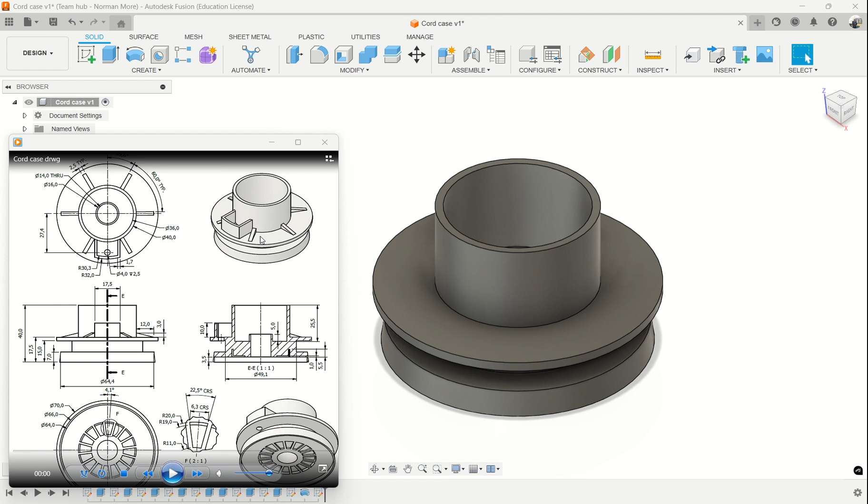In this video, we're going to continue the cord case, and we're going to put that pocket, those ribs, and some other cuts at the bottom. So we start with the pocket. We do a sketch there.

L for line. Track the center, do a line there. Line.

We do an offset, offset two sides. That is 17.5, which is the width.

So we put 17.5 and divide it by 2, because it has two sides.

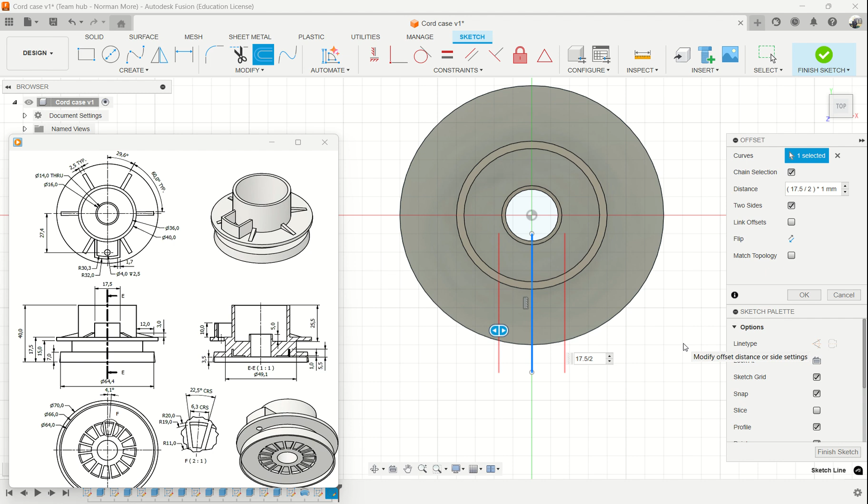And then we have the curve there, 32. So we go and use an arc. Let me push this one a bit down so that you see the arc. Center point arc, so we start there with the center point arc.

Then on that arc we put a dimension of 32. After we finish that, now let's push these dimensions a bit in the middle.

We trim off. T for trim. Then we can trim off all these. Trim these, maybe the lines were a bit too long. And then we can as well trim off that because we don't need it.

Then we can offset that. It's on one side and it needs to be inside, so we'll put a negative value there. The drawing thickness is 1.7.

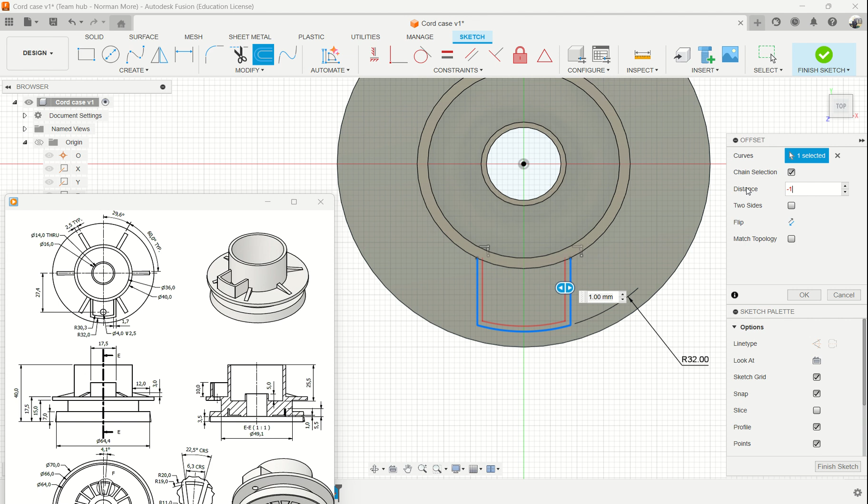But you can see on that drawing there, that's 1.7. So this one seems to be okay, but it's not fitting properly on that side, so we can extend that line.

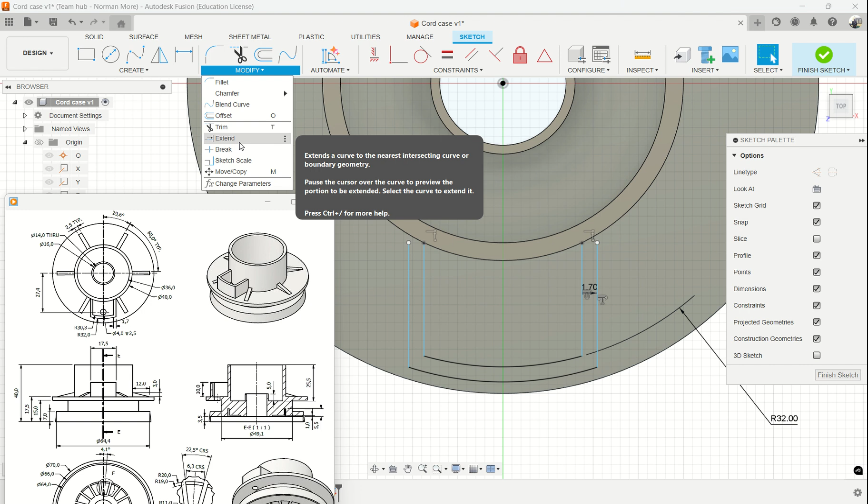We go to extend. Make sure that line reaches the end. So we do that extension.

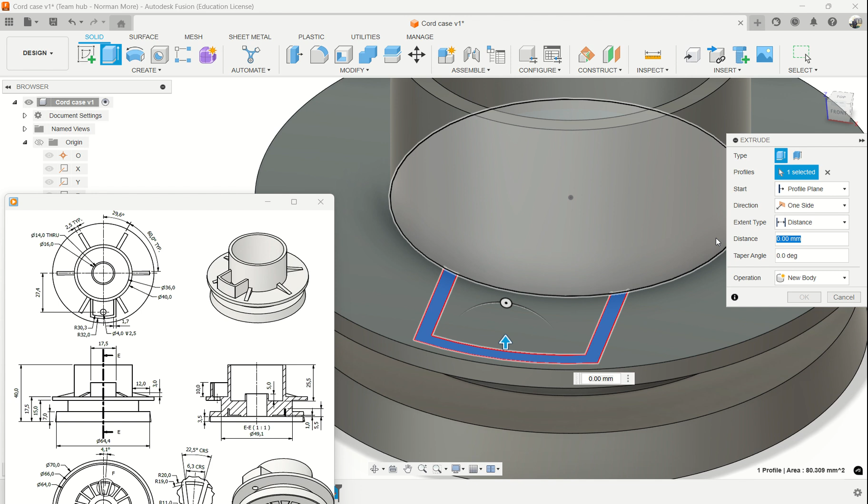What we need is that letter E. Extrusion has been selected already. The height is 10 millimeters. We put 10 and that is done now. It will blend in properly.

Look at the bottom face, there's a small hole there of 4 millimeters. So we track the center of the 4 millimeters, that is the size of the hole. Then we also put position dimensions, which according to the drawing is 27.4.

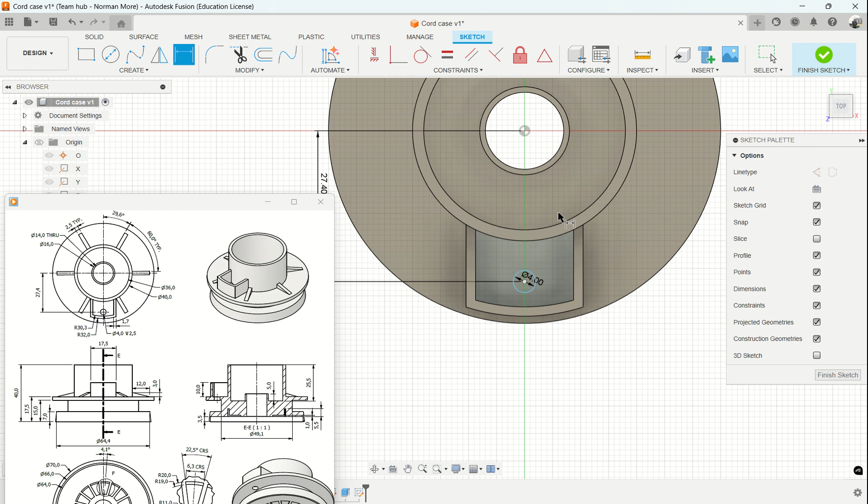And we need to extrude this one, letter E. Click on the circle. It says negative 2.5, so we put a negative 2.5 because it's a cut. That is the hole there.

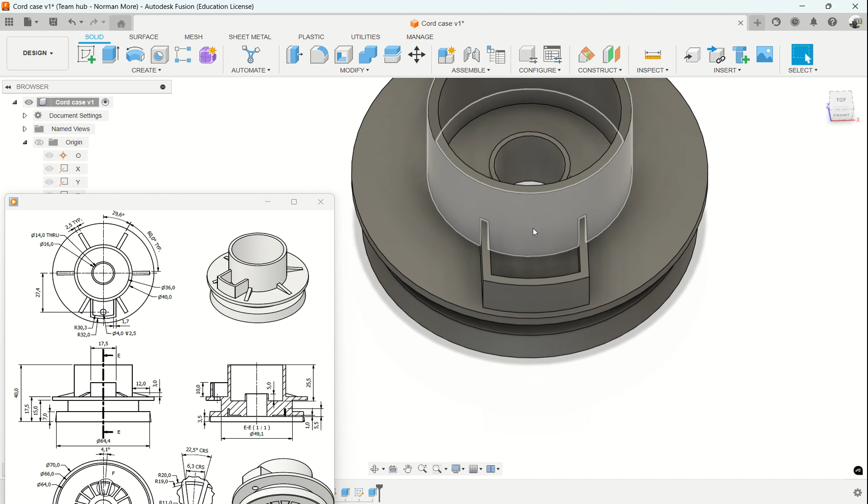So now we go to do the ribs. Click on that face, go to sketch. So we need a rib which is at 29.6 degrees, which is that one there.

That's our center line. We can put the construction, and then letter L again for line, and we do another line from there. Line hasn't gone properly, letter L for line.

Okay, then we put the angle there. I didn't want this line to go very far, I think I'll just pull it down somewhere there. The reason is that we don't need it outside.

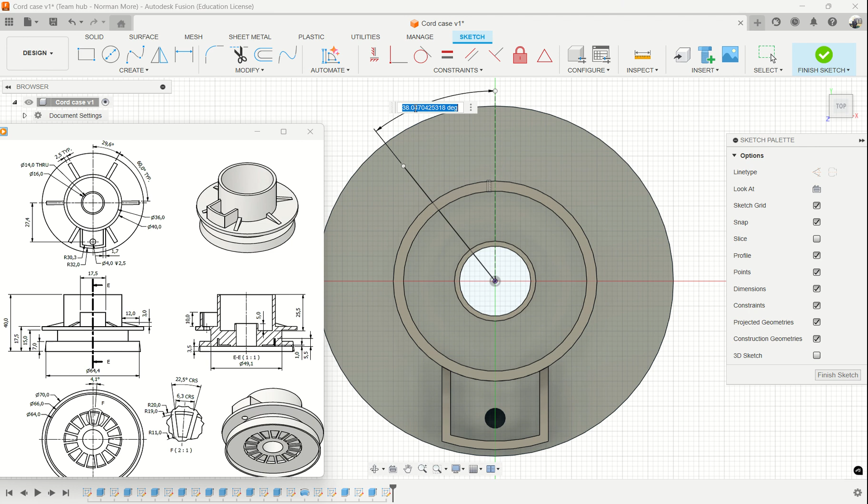So we do that angle, 29.6, and then we need to trim off now because we need that line for creating our rib.

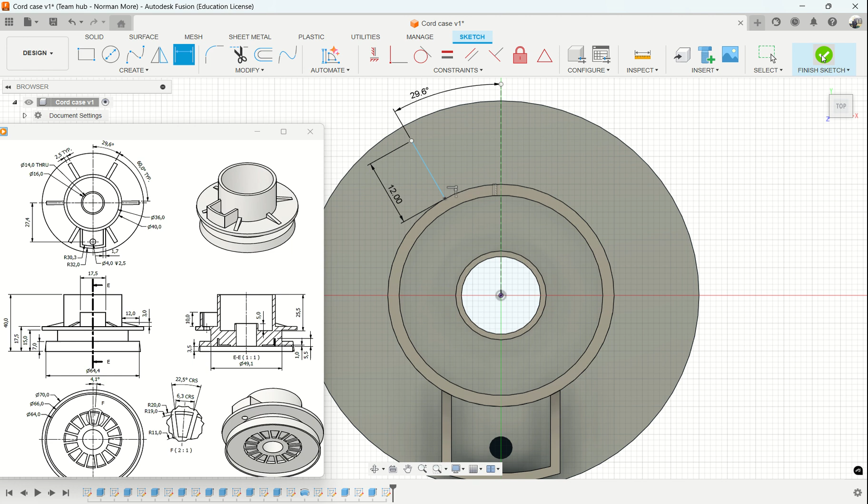So that middle line there is what we need. According to the drawing, the rib is 12 millimeters there, so I need this line to be 12 millimeters. Good. Then I click OK. Small house.

I turn around, now I'm going to make a plane. I'm going to make a plane at an angle and just go on that line. I put 90 degrees so the plane comes that way.

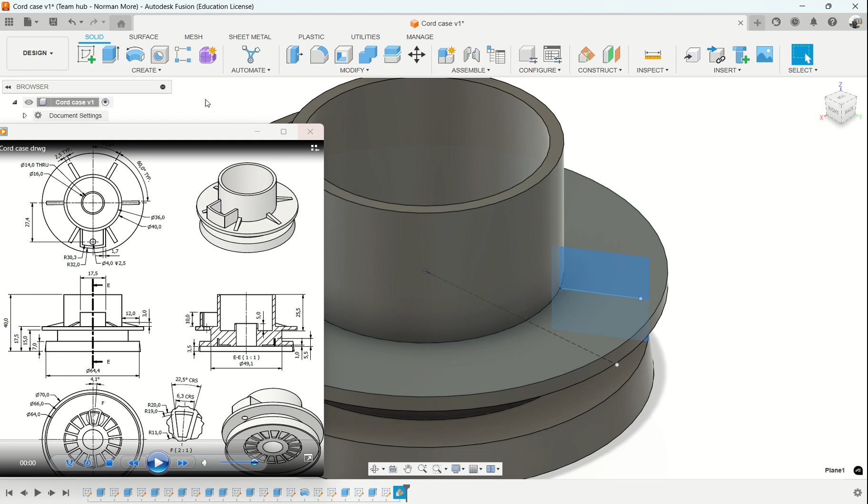So I'm going to draw a sketch here. I'll just turn it a bit so that you can see where we're going. So I'm going to project geometry.

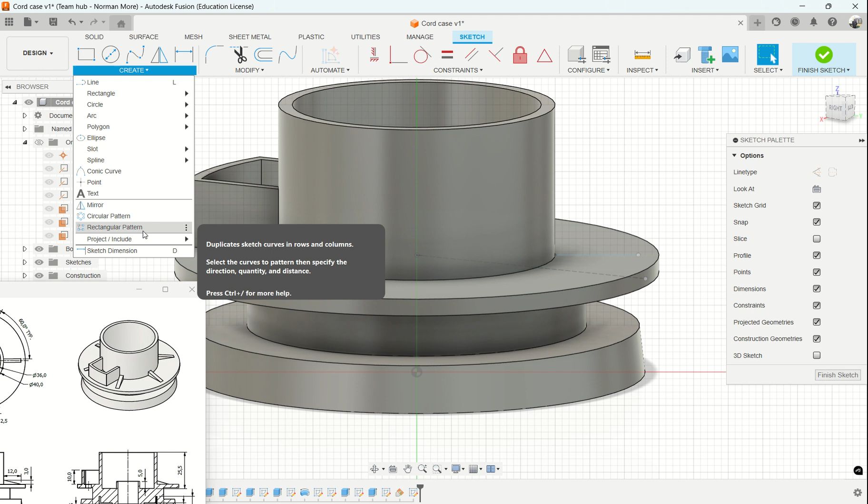From that circular part, see if we need to use it. Then I'm going to get a line, a line from... actually, we need to do project geometry again and project that line, because that line is now in another environment, not in this one, but we need it now to draw our rib.

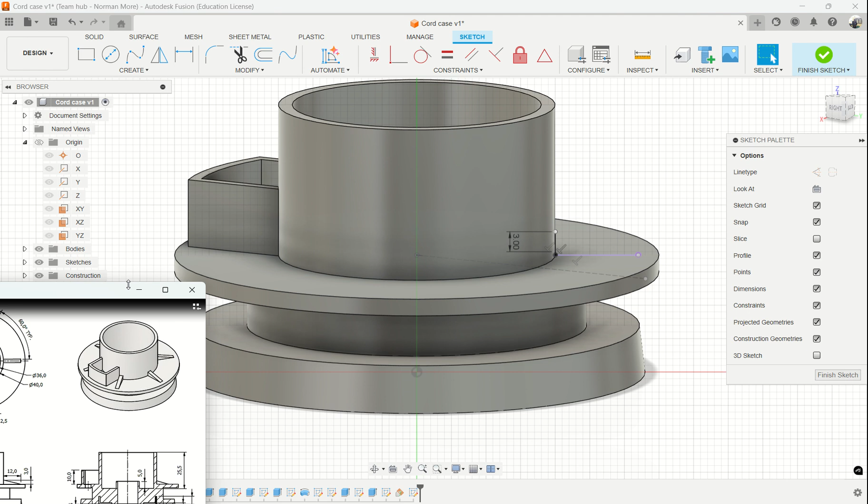So this rib is going to be 3 millimeters up according to the drawing there. It is 3 mils, there you can see it. And then L for line.

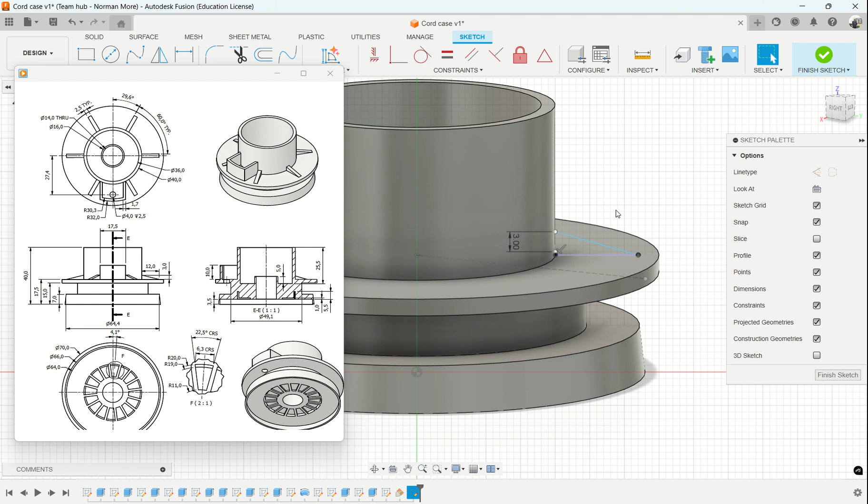So if I start there and go up to this point, then I'm going to make a line. So I don't need all this. I will just delete this line which we used, because all I need is that line. I don't need a closed kind of shape.

So I can put this one down and then I go to create. I look for where there's rib and then I will click on that line, which is what I need. If you drag this line a bit, you're going to see.

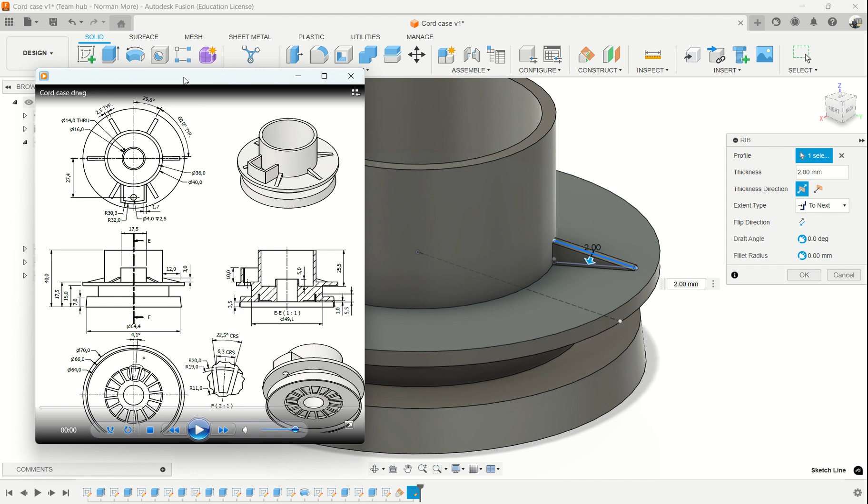So according to the drawing, the dimension should be on one side, but I found that if you do symmetrical, that's when it looks more like what it is here. To achieve that, it needs to have that line on symmetry in the middle. Okay, so this blends in very well.

All I need now is to put the thickness, which according to here is 2.5. So go here and type 2.5. I have a rib there already done.

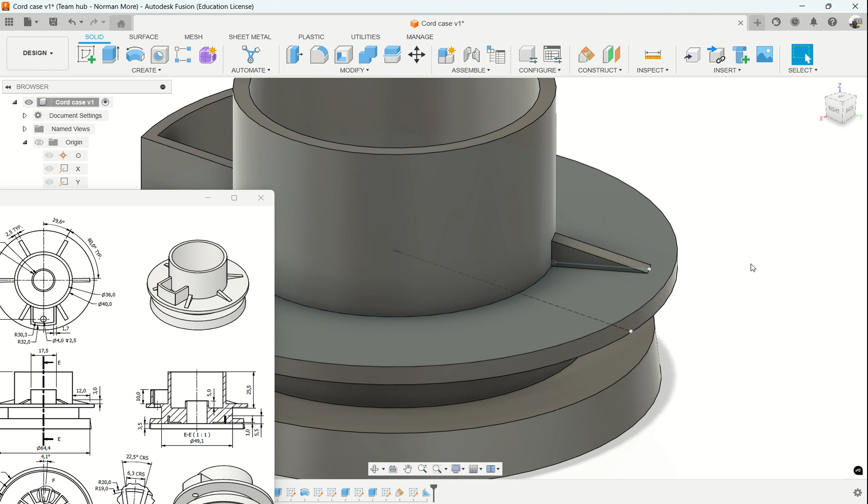Okay, so now we need to put the others. I'll just click here on the top view and see now how we're going to go about the rest. So we shall just do mirror. Let me put this one down because I don't need that much. Actually, I need that drawing there.

So I do mirror, mirror, change this one to features. Sorry.

Then I click, I choose that one, and then I select a plane. All I need is a plane in that direction, which is that. And then I say okay, that's done.

Again, I can put this one a bit down there. Now I'm going to choose the features. I'm going to choose those two objects, this one and this one. And then the mirror line will be that face, I mean that plane. Then I click OK.

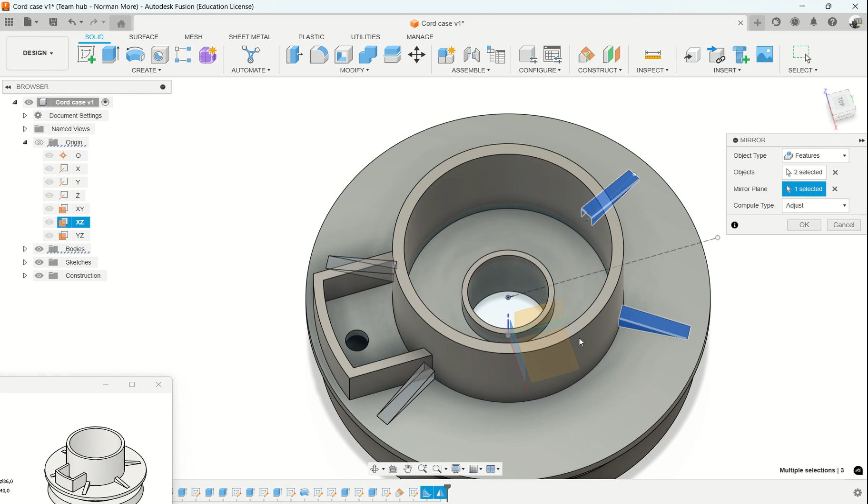Okay, so now if you look at this one from the top view, you're going to see how it is supposed to be. Okay, then you go back and check the angle because it looks a bit in.

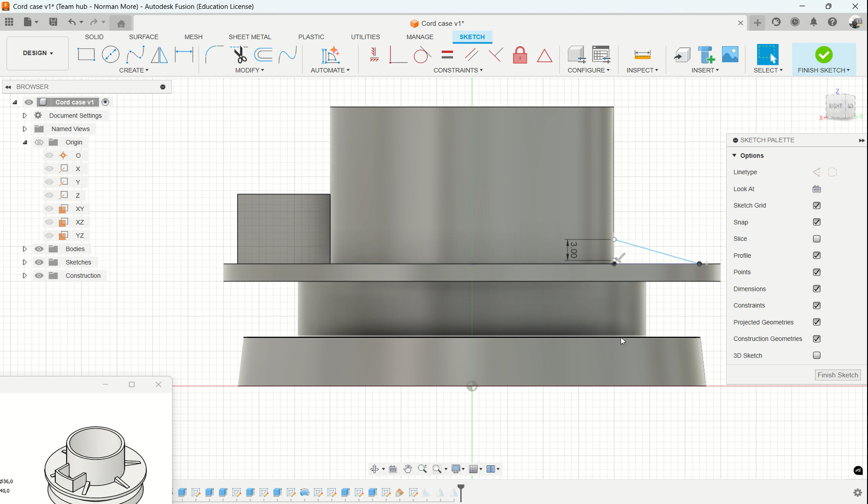Let me edit this sketch and see. This is not the one. I edit this sketch.

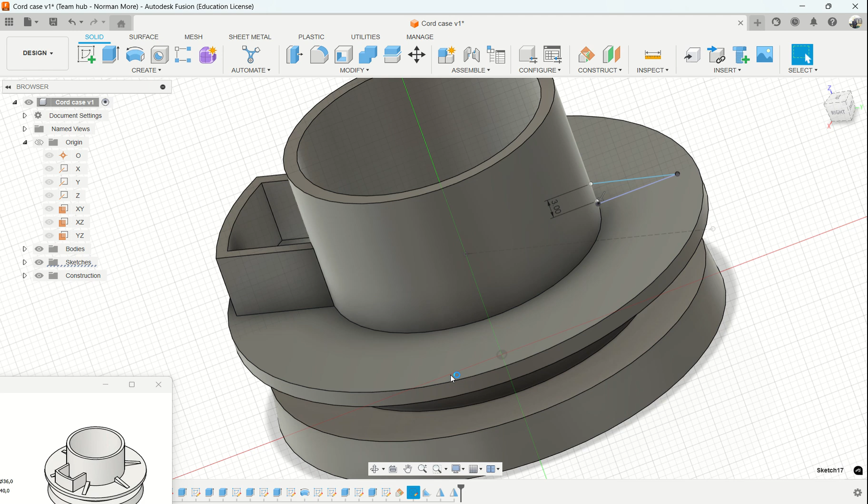Okay, let me leave that one a bit like that and then we go on. We may have to do a small adjustment.

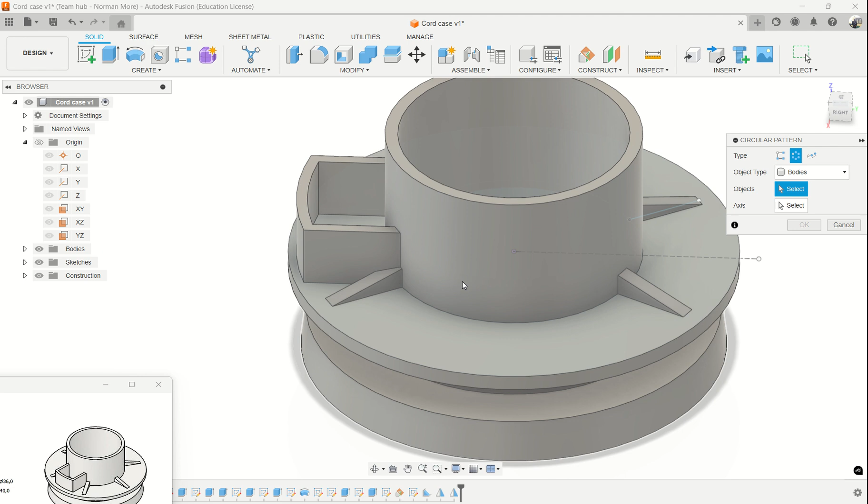Okay, then for the next one, I'm going to do a circular pattern. Again, I choose features, I choose that one. And for the axis, I choose any of this on the side. We need two of them.

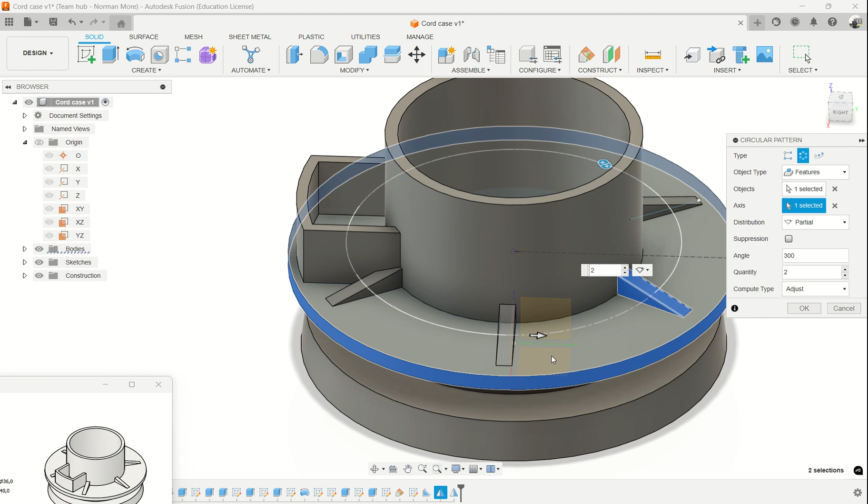You choose a partial angle and you put here 300. You need to make those calculations yourself and see why I've chosen 300. I have one already here on this side.

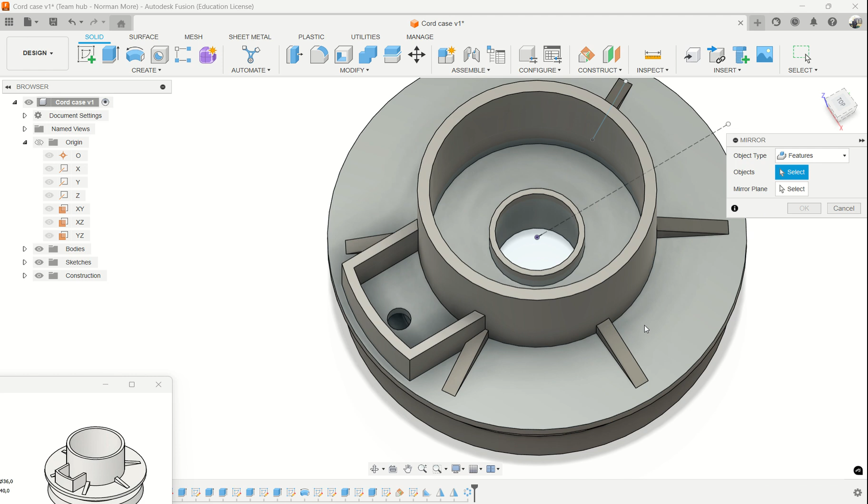So the next one I need to do is I just need to mirror this one that way. So I go back to mirror, choose that one, and then select the mirror line, which is that one. Then I click OK. That one finishes off all these ribs.

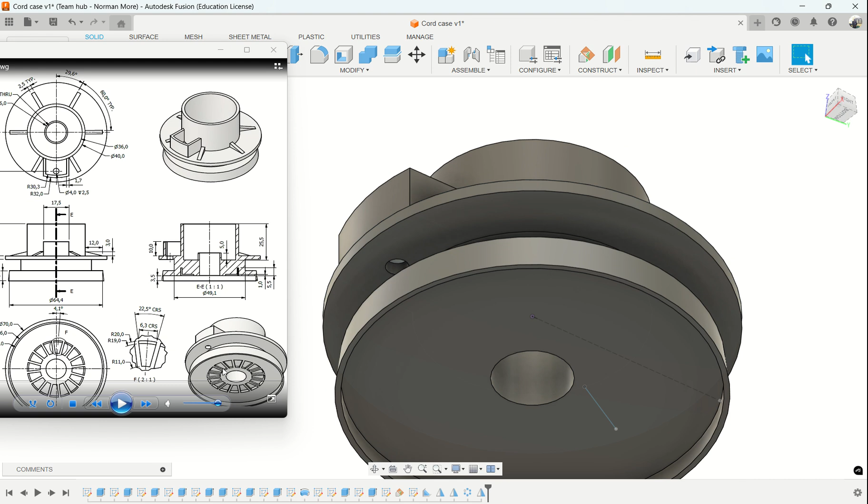Then I go down to put the final part, which is those are the holes. So I click here, then I do it smaller. Okay, then I do sketch.

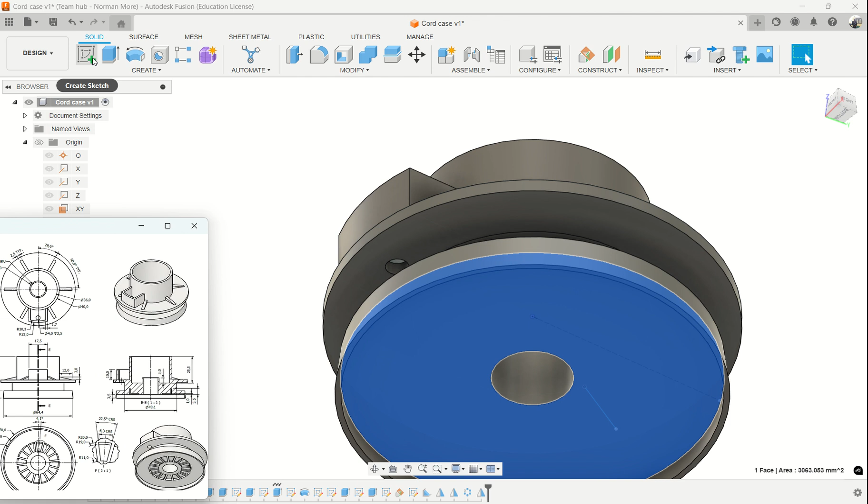Now we're going to do that shape there. So this one is a bit tricky. L for line, we need to do it one side. So I click there, L for line again. I do that way. The line is shifted. L for line.

Something wrong with mouse. Then I do center line or construction. Now I'm going to use the arc. Just a moment. Let's finish the whole drawing anyway.

So I do a mirror, that's the object, and that's the center line. Then I click OK. This one has a radius of 20 and 19, and then 11 at the bottom.

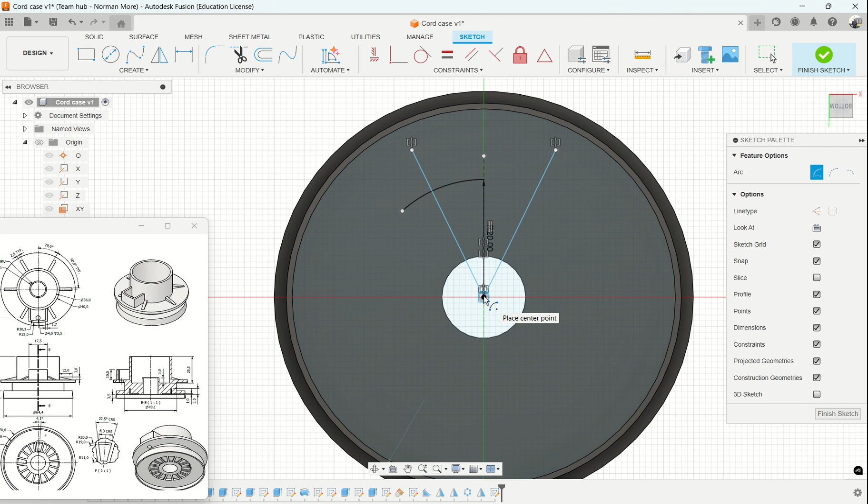So I'm going to do arc, center point arc, and then I do 20 from here to the center. I'm just going to do halfway because that's how it works better. Again from there, I do 11, and then I click and do to the center. And then I do again.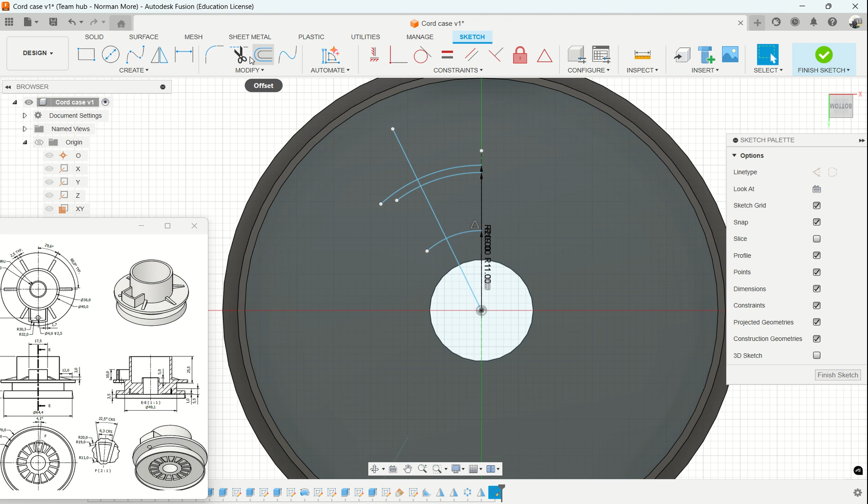I do 19, which is the next one. I'll show you where it goes to the center. So the aim is that I just want to do that shape halfway. Probably it's not very necessary now. And then I trim, so I trim all these, and this is the shape there.

So what I'm going to do, this shape, I'm going to mirror it. Just going to select everything, and then choose mirror. Select the mirror line.

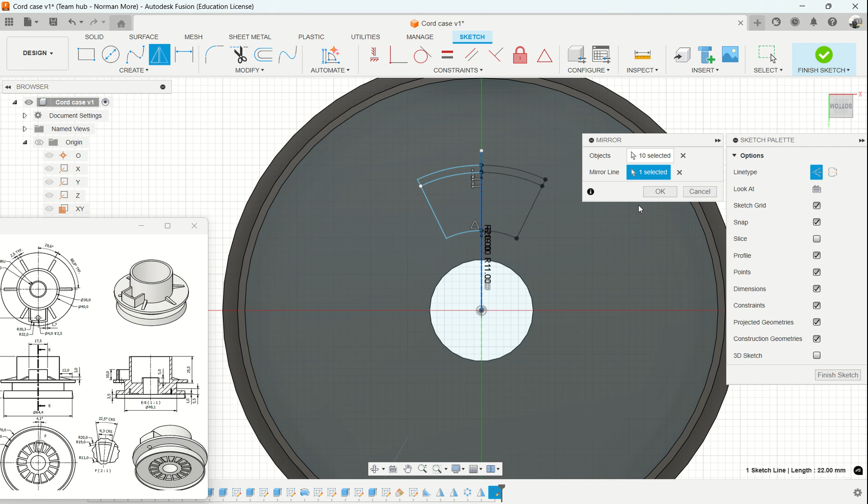Yeah, after I've done that, that's when I put the dimensions. I'm going to put angle here, which will be 22.5, you can see from that drawing here. Then I'm going to put a distance between that point and that point, which is 6.3. That's the shape we need.

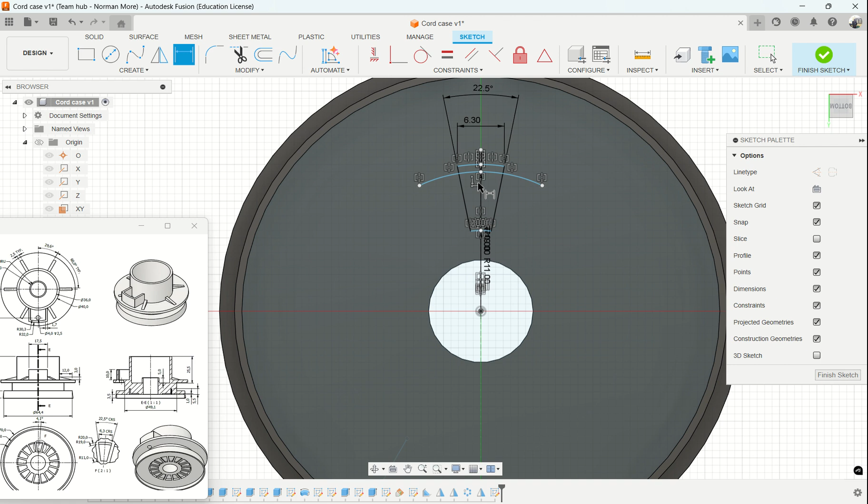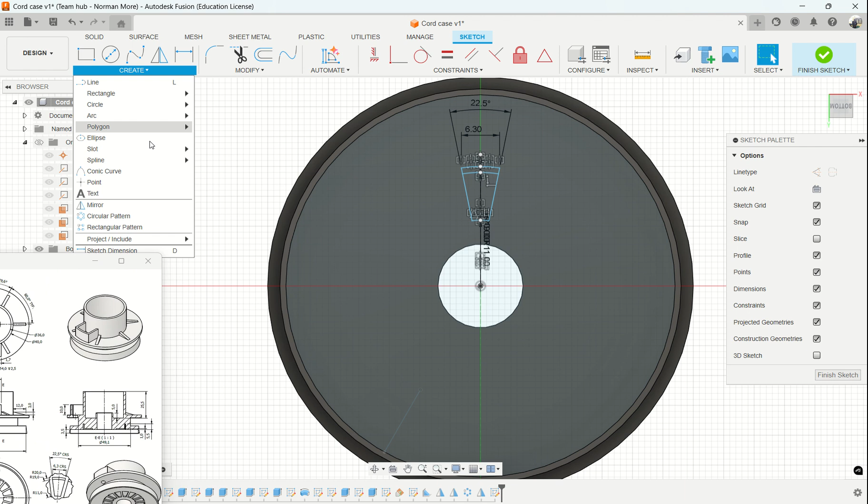Okay, so please do it in that order, otherwise you won't be able to get it properly. So after this, then I'm going to do a circular pattern. So let me push this one a bit down to the side. Then I go to circular pattern.

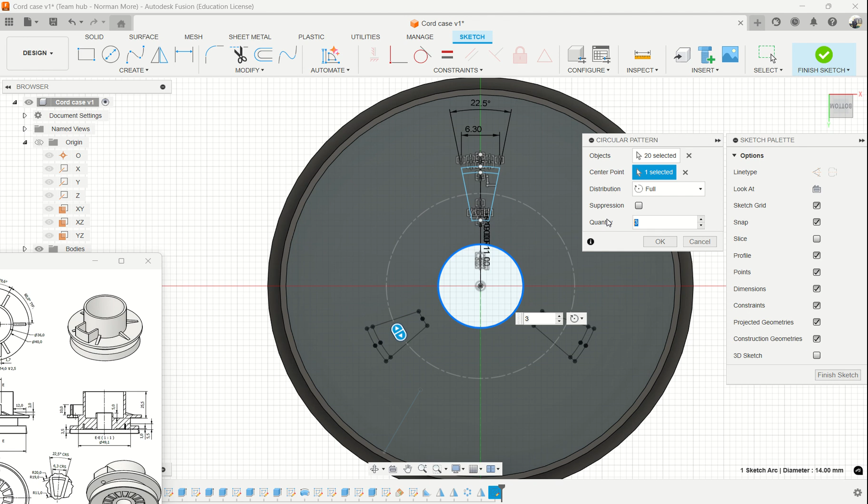In the pattern, I need to choose the whole of this. The center point, I prefer to do one of the circumferences there. And then this is a full one, and we need 16 instances. I click OK. So those are the 16 instances at the bottom.

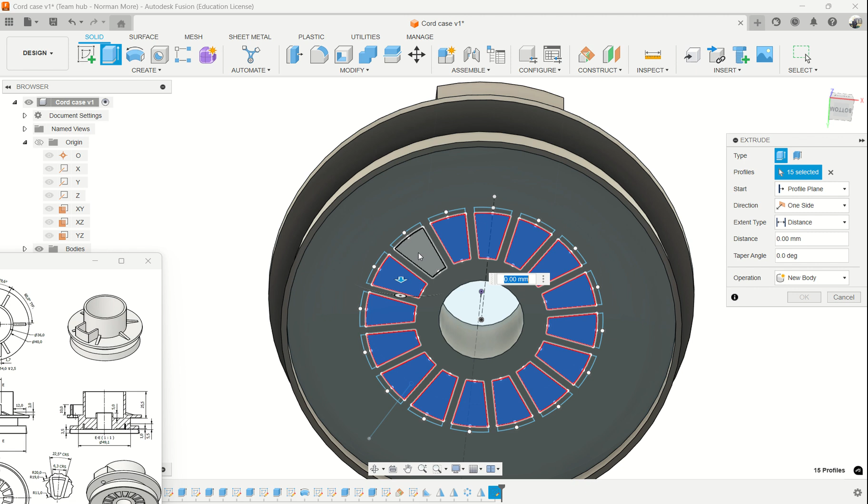Then I do E for extrude, and then I just need to pick all these one by one, the inside. The drawing goes in by 1 millimeter, so what I need to do is put -1. Then you have cuts all around.

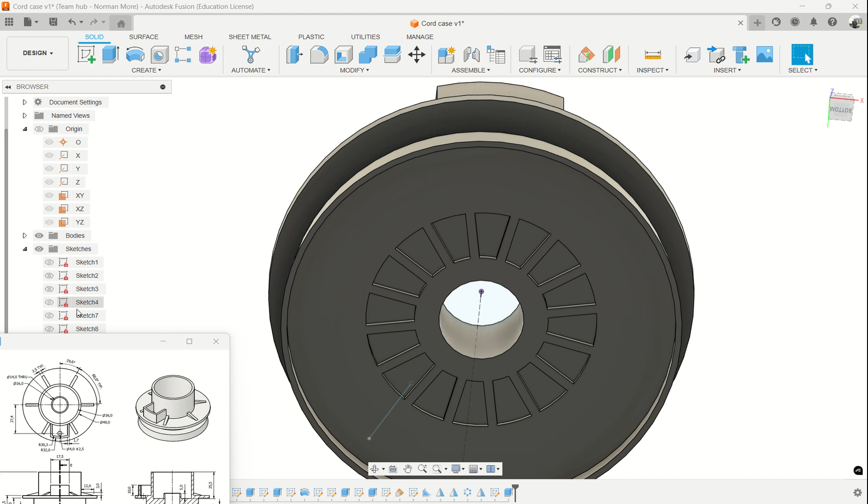Now we need to finish off with another cut, but the sketch has disappeared. So I just need to go to the sketches here and bring up the sketch again. It's probably this one, okay? And then I do another.

If I go back, I need to do another cut, which is here, 5.5. So E for extrude, and this time I pick those top parts. E for extrude, I pick those parts there. Pick everything. Take some time.

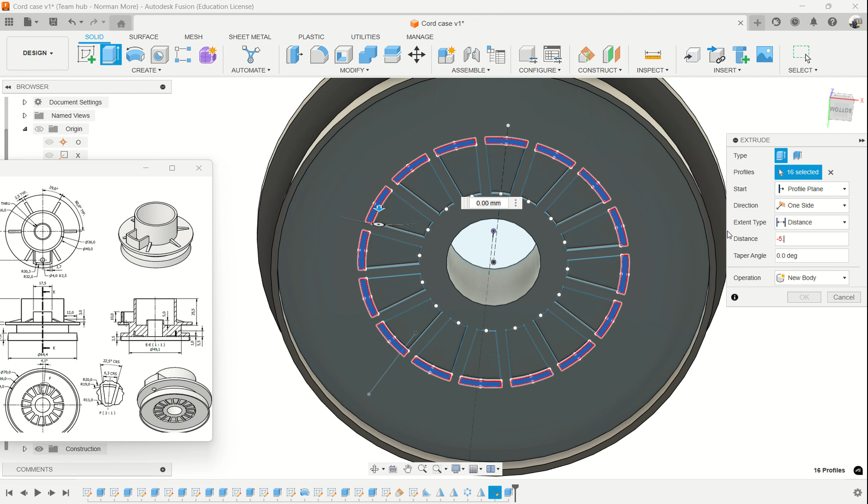That's -5.5. Okay, so I think now all these are finished. We need to remove that sketch, switch it off so that we can see the final drawing.

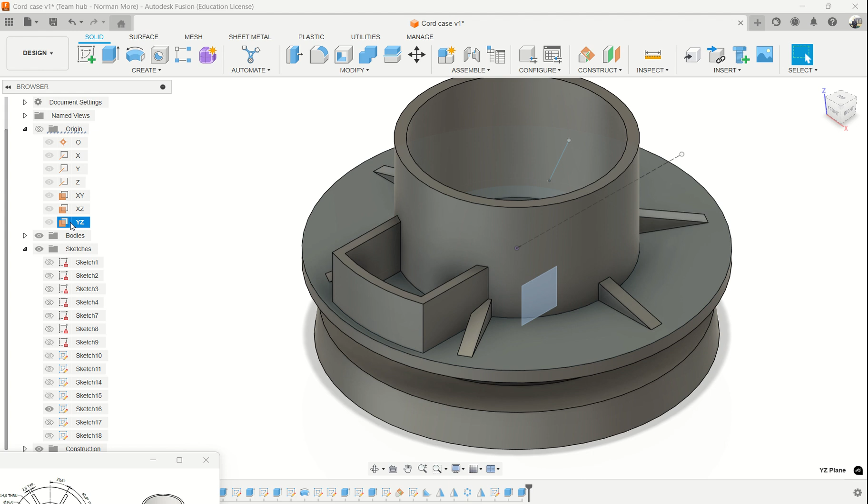So if you want really to see that you did the right thing according to the drawing, then I'm going to split it. If I go to the middle plane here and then the splitting tool has been selected, that one, and then I click OK.

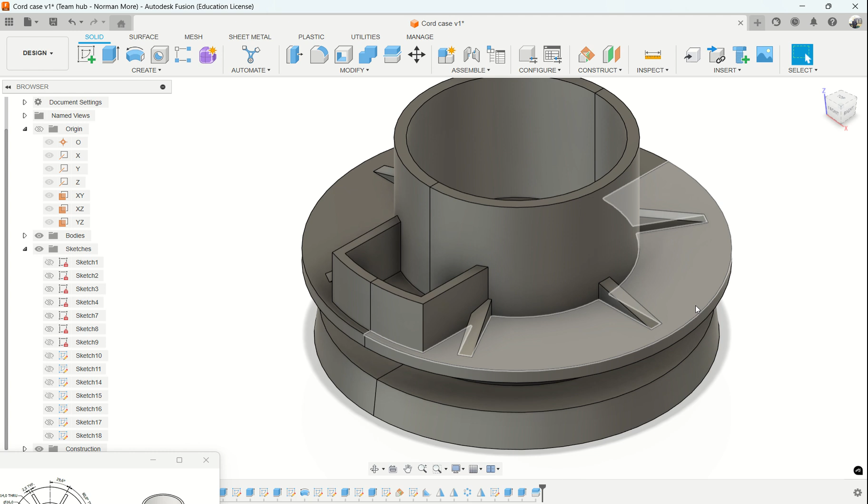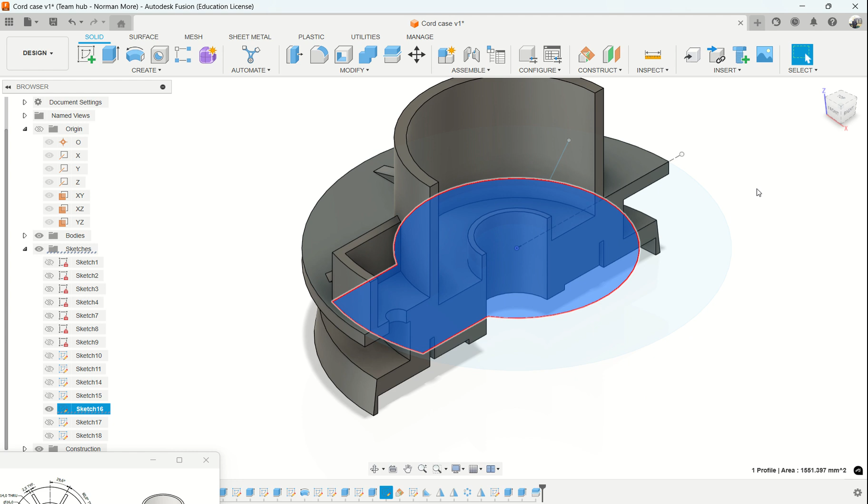So what I'm going to do now, I'm going to hide one of these. If I hide this, I want to hide part of this body so that we can see only one of the bodies here. If I click here and then I show it, small house, I need one of the flat.

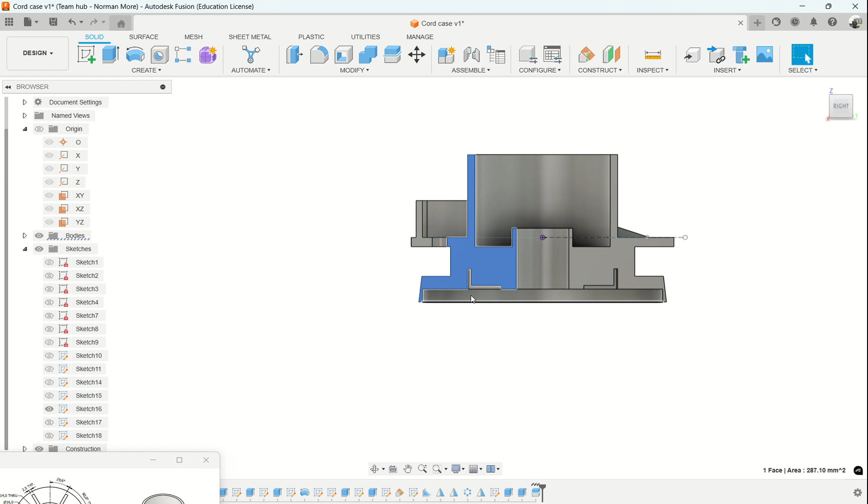Then that. So if you see that, you look at the drawing here, that view there is that one. And everything is finished. Okay, so I return it back to, you can go back to the other drawing.

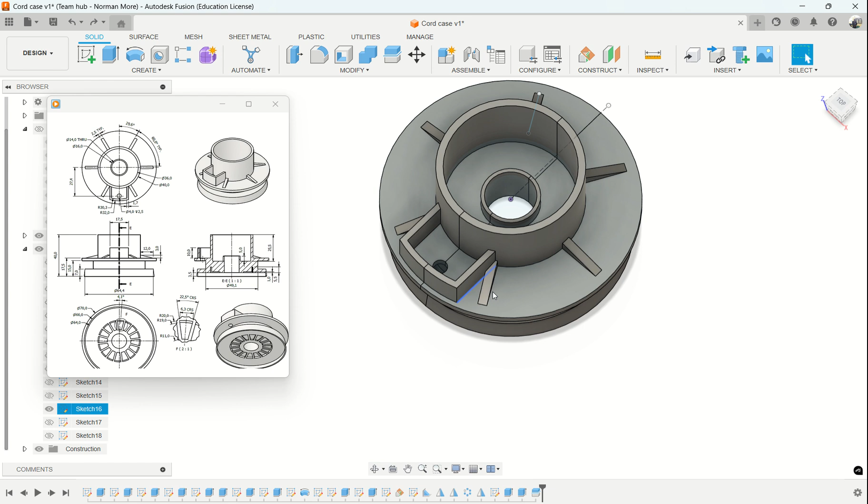I need to do a bit of tweaking here because maybe one of these entered a bit too much there. That's up to you to correct. Thank you.